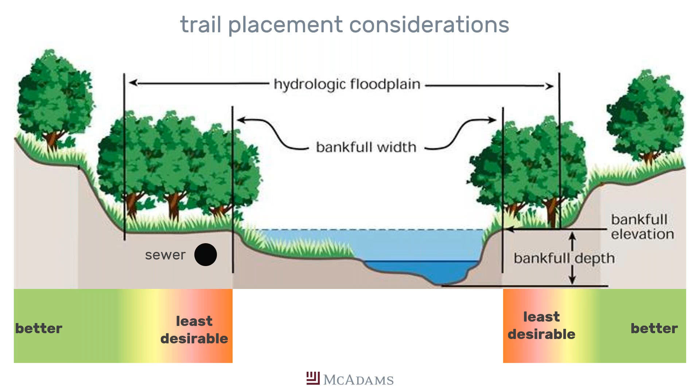But given the amount of competition for that land and how expensive it is and how traditionally underfunded or poorly funded greenways are, we end up down here closer to the stream where it becomes more problematic. And we're going to go through some of the pros and cons with each of these areas. So when we're looking at this high and dry area, obviously we're going to have lower maintenance costs because this location is not going to be inundated by stream flooding. And we do have fewer water quality impacts, and it's going to be a much easier permitting path.

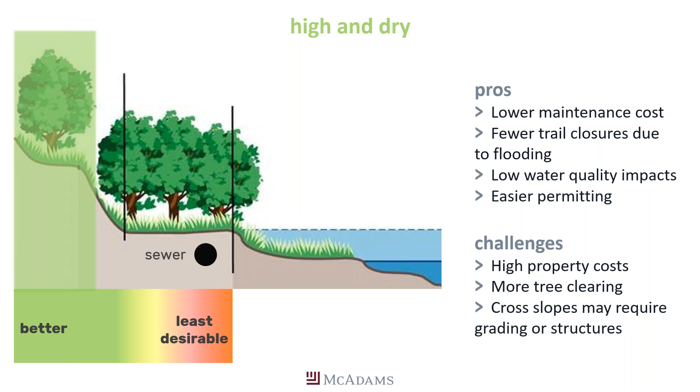Some of the challenges we talked about are the high property cost and the competition for that land. We do encounter more tree clearing, and when we try to minimize that tree clearing, we can incur some more costs on the project when we're using retaining walls or structures to try to keep our clearing impacts as narrow as possible.

When we look at this area, and we'll just call it floodplain fringe, this is a very common area for us to be in. And we have, again, lower property costs because traditionally this is not going to be developable land. And there may be areas that are under existing easements or public control. It's getting flatter, so the design to get comfortable grades in there and the amount of clearing we would have to do is less. And then we know that people like to be close to water. So this is getting people down and close to the stream.

Some of the challenges is that we do have more impacts from a water quality and quantity point of view because we have a shorter distance between the edge of this trail and the stream bank. We would require floodplain modeling and permitting anytime we are inside of the floodplain. And then this is going to be a more flood prone area and is going to see higher maintenance costs because of that.

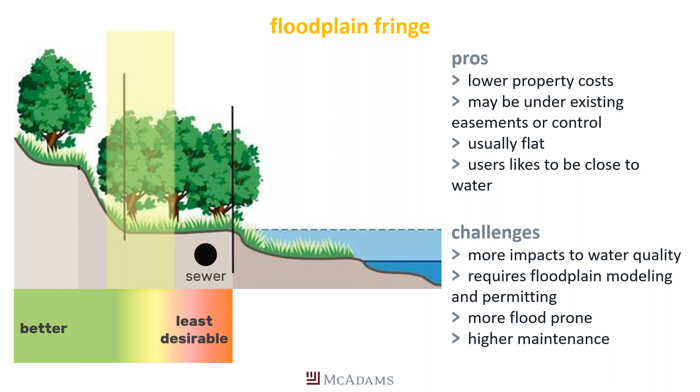When we get into this streamside area, and this is what we're going to be talking about today. So we preface this by saying you should ideally avoid being here, but a lot of trails end up here because this is the land that is available, and it is a corridor that is already under public control. So it does often overlap with an existing sewer line, and that makes it a little easier for us to get in there for construction access. And it's usually already cleared and maintained, so we have a low clearing impact, and it's very close to the water, so people really like that.

Some of the challenges is that this is a very flood prone section of the riparian corridor. We do have more water quality impacts. This certainly requires FEMA modeling and permitting. It's also going to require stream buffer permitting for most jurisdictions and in certain basins in North Carolina. And then the relationship of your trail to your sewer can be problematic as well.

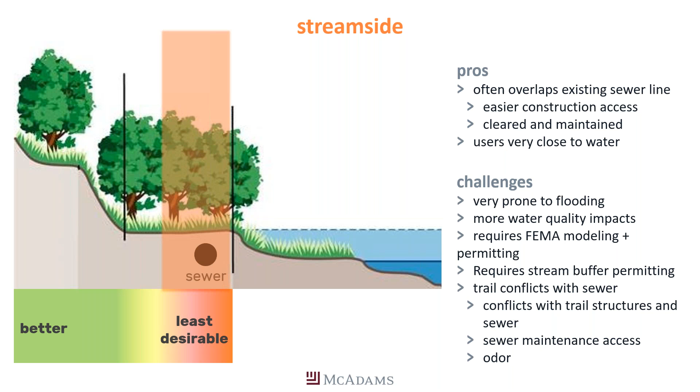Obviously, we can't drive piles on top of sewer lines, so we often encounter jurisdictional wetlands behind this natural kind of rim that goes into the stream bank. And we usually cross those with boardwalks. That becomes more challenging if we're on a sewer. And then the access for sewer maintenance has to be maintained. And we all know what sewers smell like. So that is an issue as well.

So when streamside is our only choice, we're going to switch over to a little video and show you what this looks like. We're going to look at two different trails and come back and get into the conversation a little bit more.

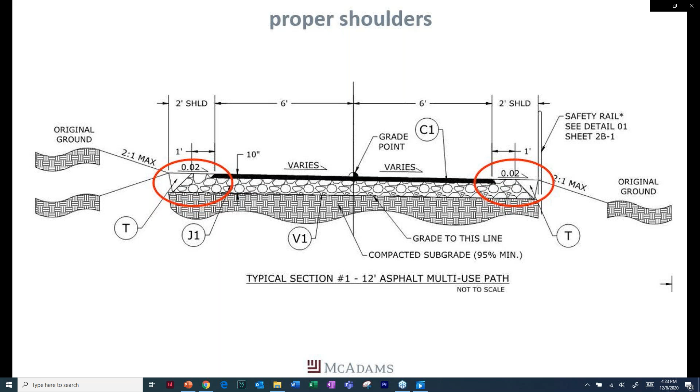Let's talk about how we achieve that vegetation right up to the edge of the trail that Rebecca was talking about. And we do that by creating very stable shoulders for our trail and seeding back all the way to that. We're going to take a look at a couple of examples on this trail. There are a couple of different segments, and one has really good stone shoulders on it and stable vegetation. And we're going to take a look at another one that doesn't have that same.

We also want to talk about the shoulder here. So this shoulder is actually a constructed shoulder. Oh, okay. So this is 2 feet of stone, and then you seed back up to the edge of it. So you're immediately getting vegetation right up. This itself, right? So shoulders are incredibly important.

Yeah. You can see in the shoulder, we've got nice vegetation all along the edge here. So as soon as that water leaves the trail, it's being treated. And the vegetation is helping slow down the runoff as well, so that it's not erosive. And you can see this is in good stand.

So this is the same trail, but this section of trail was designed without the 2-foot shoulder. So you can see here it was formed up, and then we just have bare earth here. In the section we showed you earlier, we have 2 feet of stone built up to the edge of the trail, and then we seed right up to it, so we get vegetation right to the edge of the trail. This is also problematic from a shoulder point of view, because on a bike it's easy to get off the steep curve, it's easy to roll your ankle.

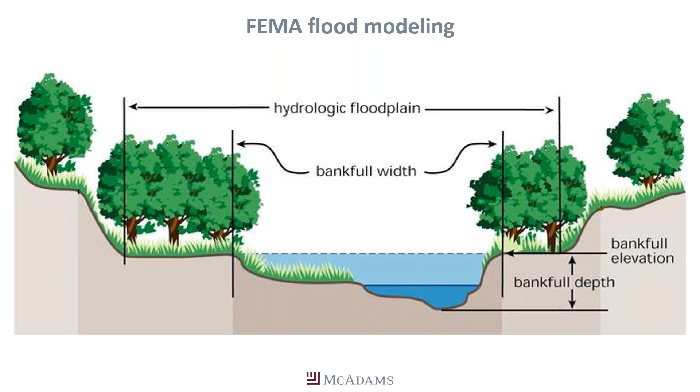So this is an important piece of greenway design. Greenway design and floodway modeling are a very iterative part of our practice, and making sure that those two different design elements are working with each other is kind of the only way to get projects like this on the ground.

We talked about the sewer. You need to make sure that you are doing your sewer coordination very early in your process. And there's a series of questions here, and there are other questions, but these are just a few that you need to get straight with your sewer authority very early. So can a trail be put on top of the sewer line? We saw on the Chapel Hill project that we went directly on top of the sewer and sealed that manhole. Are there plans for new sewer lines? Where would those go? Can we have structures within the easements?

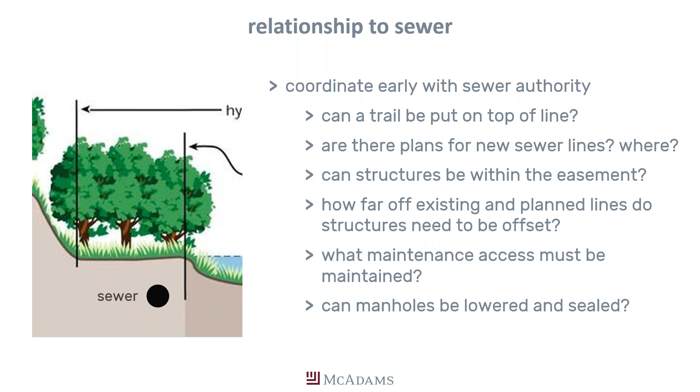So some jurisdictions don't let you even have structures within their easement at all. That's important to know early on. If you can have structures, how far off do they need to be from existing or planned lines? What's the maintenance access? And then can you lower and seal manholes? So there are other questions, but if you get all of those answered early in your project, you'll be in good shape.

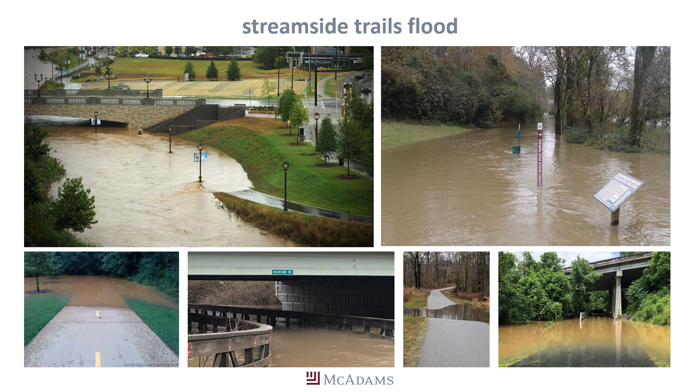You also need to know that streamside trails flood. And so your clients and the jurisdictions that you're working with need to understand that this is a reality, and it's becoming a more and more common reality that these projects flood. And so there are some design mitigation factors that we can take to deal with this. Material selection is very important.

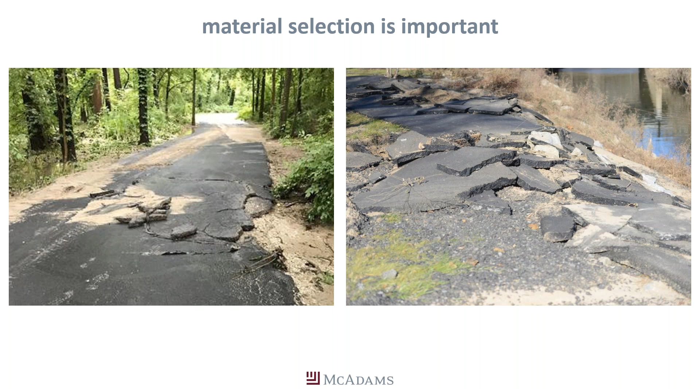What we're showing here is asphalt that has been blown out during flood conditions. Actually, we've got a better slide coming up to show you how the shoulders play into this. But asphalt, when it gets undercut and the water starts flowing underneath the edge, basically just floats and breaks. And so asphalt is not an appropriate material in areas where you know you're going to see flooding.

So when we're going under bridges and other areas where we know we're going to have regular inundation, always switch those sections out to concrete. And you can also do some turn downs on the stream side edge of your concrete that further protect your Greenway trail from erosion.

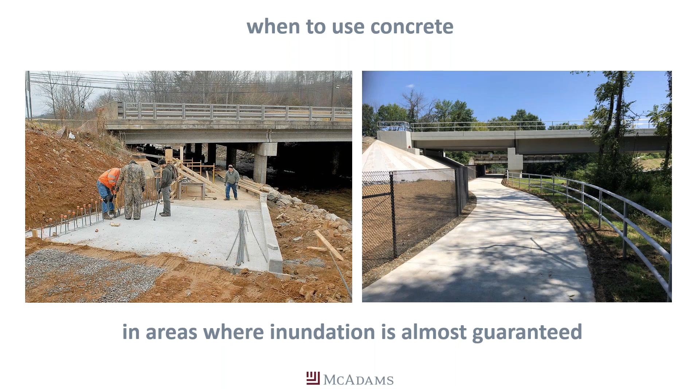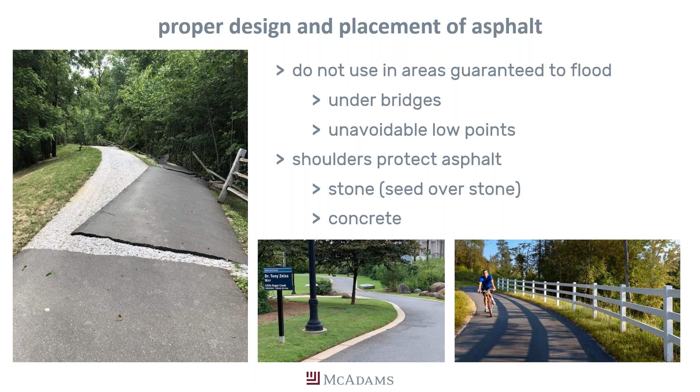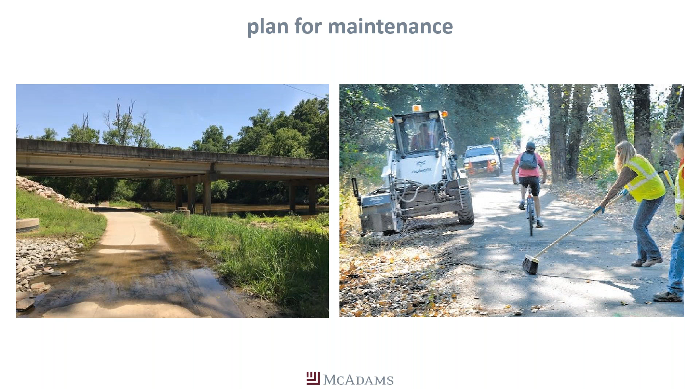You also do need to plan for maintenance. We know that these trails, when they get flooded, have siltation. And so it's important to plan for maintenance. And so let's talk about shoulders. I'm going to let Graham take over and talk about this a little bit.

Thanks, Iona. So this is a typical section, I think we had it in the video, of what we're trying to achieve with an asphalt trail. Like Iona said, when we are getting into those inundation situations where the trail is being flooded, we want to use concrete. So this would be a different looking typical section with a turn down on the stream side, probably on the right side there where it's sheeting across, and we can design that with an 18-inch concrete depth on just that side to protect against the flooding events and water running alongside it.

When we have a trail that's not close to the creek, where it's not expected to be flooded all the time, asphalt is a more economical design and holds up fairly well, especially if designed correctly. So we have an 8-inch ABC base with 2 inches of surface. And you can see in both of those red circles there, we've got 2 feet of ABC that extend past the edge of the pavement. And that is the stone shoulder that we're talking about.

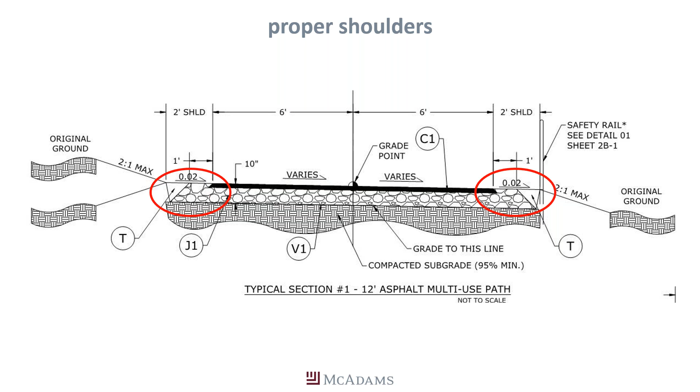So you trench down into the dirt so that you're not creating a dam effect. So that's the picture on the left here. You actually cut down into it the width of your ABC, so for a 10-foot trail, that's another 2 feet on each side, so 14 feet total. And then you pave on top. So that's our paving operation on top of your compacted ABC.

And then you come back after your paving operation and you add additional ABC as those shoulders. And that doesn't have to be compacted. The compaction is really for the pavement itself, but those shoulders do settle in and they do silt up a little bit with the first rains, and we actually recommend seeding those shoulders as well.

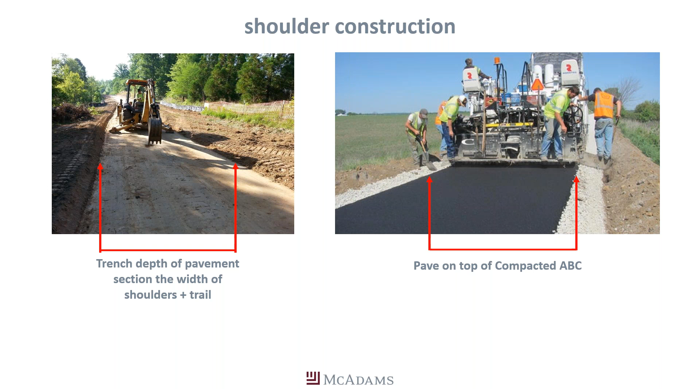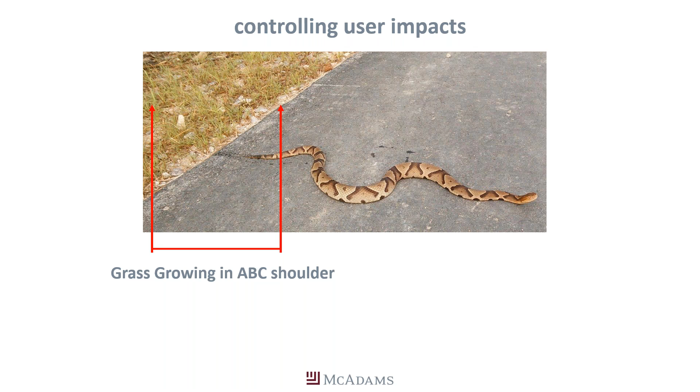So we do have a couple of different options that I mentioned: the seeded stone shoulder, which Graham just spoke about, and the concrete shoulder to really lock in your asphalt. That's probably the most hardcore, if you will, shoulder solution that you can go to. And then you will sometimes see an exposed stone shoulder. This is only really for a high and dry condition. We would never recommend this for a streamside option.

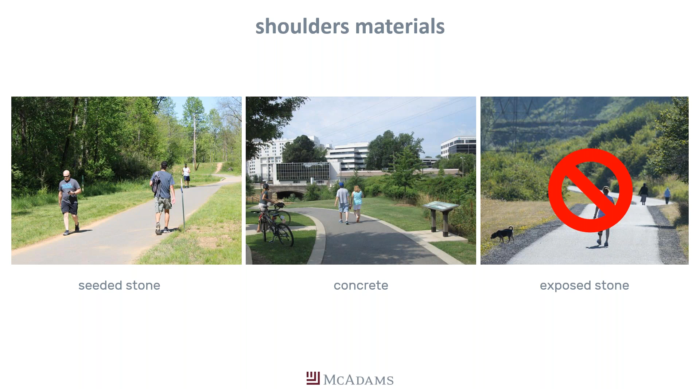And so just keep in mind that you really want to come back and stabilize your stone shoulder with seeding after that.